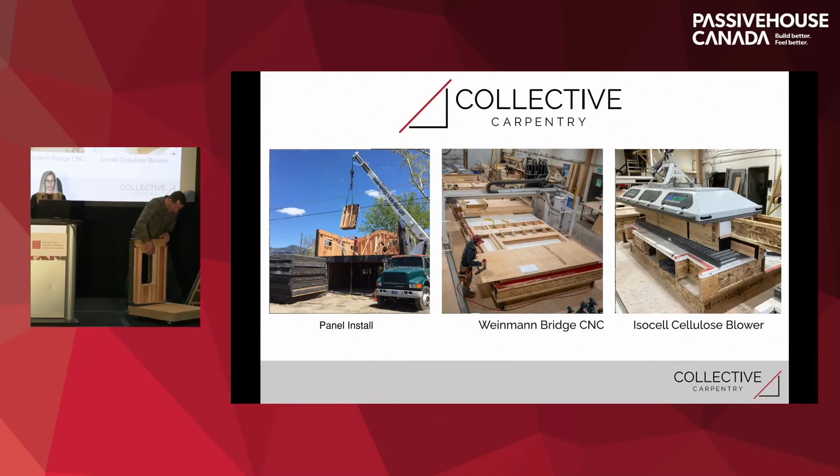Our scope of work includes the high-performance building envelope, structurally insulated and weather-tight and airtight as well with an integrated rain screen. We do the envelope of the building as well as any interior floors and structural load-bearing components.

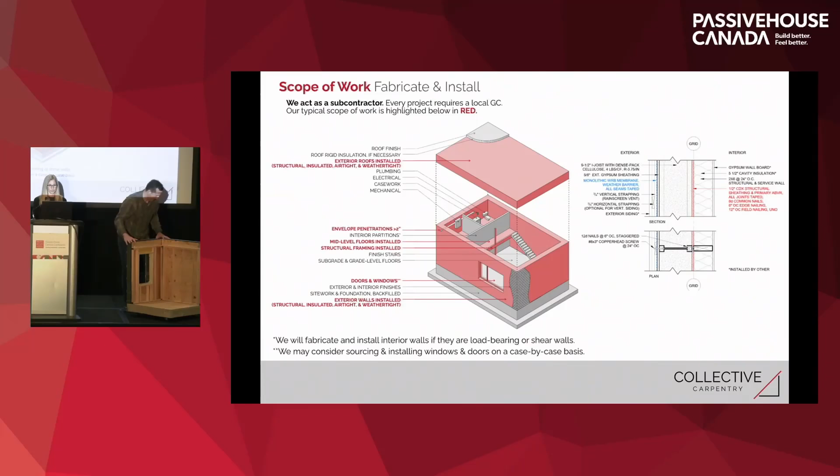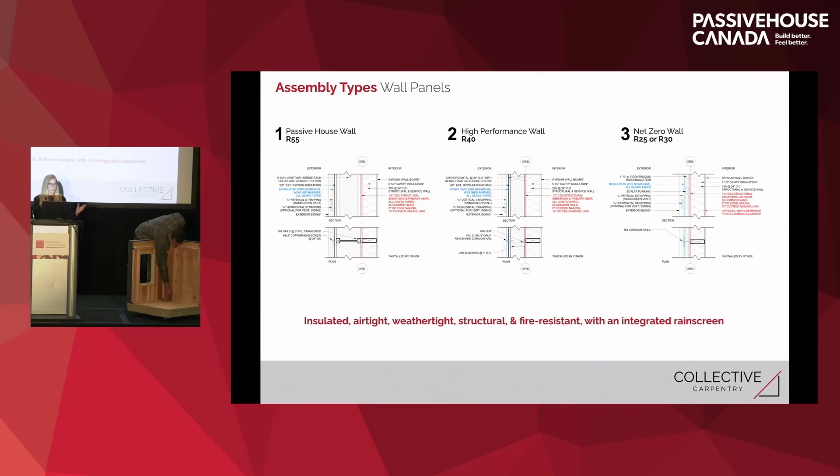We have 3 different wall types to accommodate different climate zones. Our bread and butter is the I-joist wall system, which is about R55, and that is what our model is showing here. It's composed of a 2x6 structural interior layer, and this is also our services layer, so it's installed open cavity. Beyond that, we have a 1/2-inch CDX air barrier.

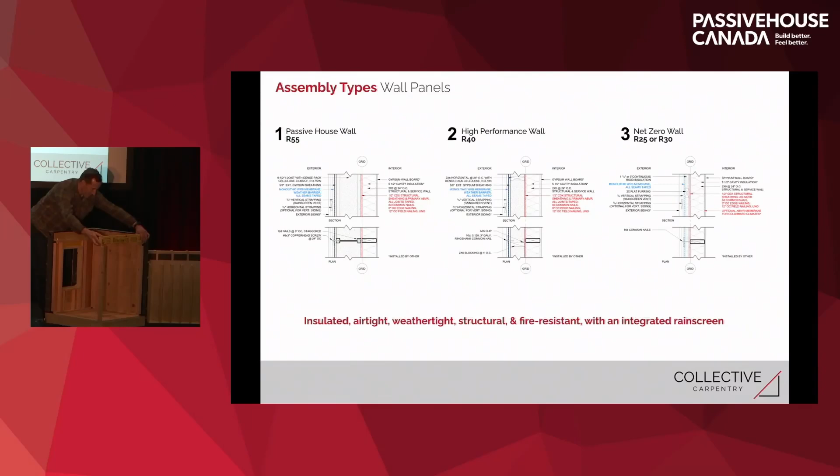The plywood is taped airtight, and beyond that is our continuous insulation layer made up in this wall type of a 9.5-inch I-joist, which is the cavity for our dense pack cellulose. We also have the WRB and, as I mentioned, an integrated rain screen.

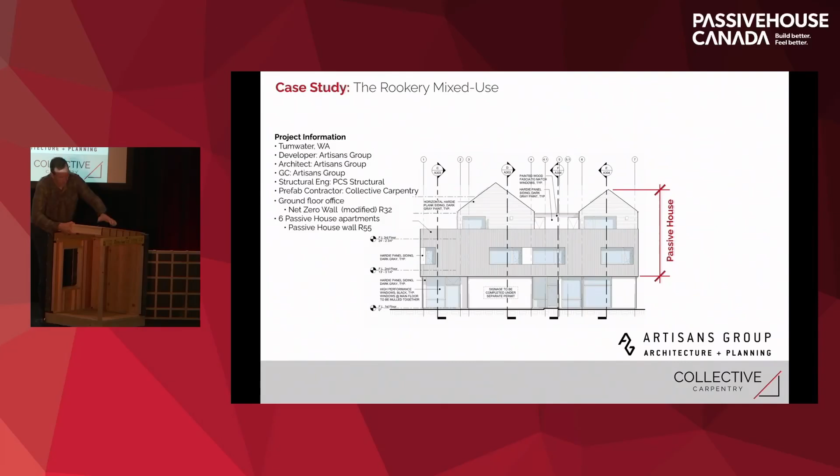We do some multifamily projects, and this is a project we completed last year in Washington State. This is a mixed-use building with ground floor offices, and the top floors are 6 passive house apartments. This is in Washington State, where the architect also served as the developer and the general contractor. And we prefabricated this. The walls are the R55 passive house wall.

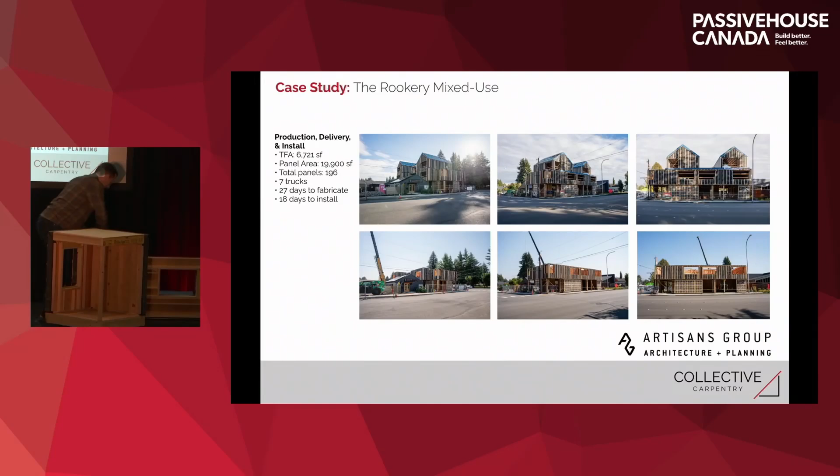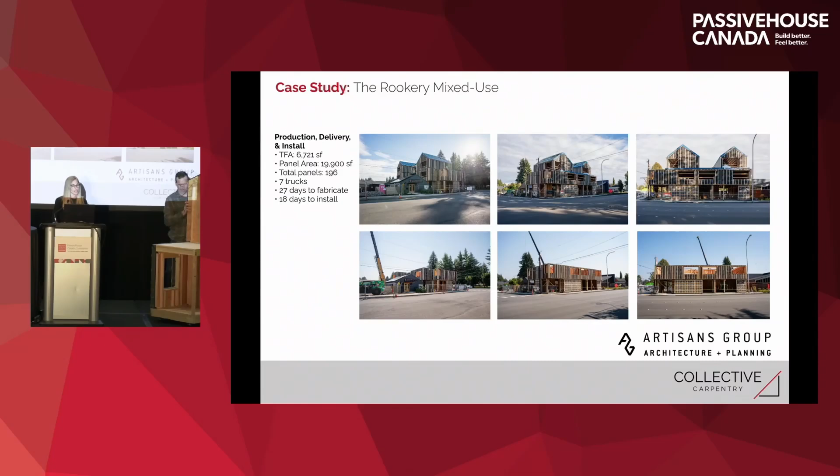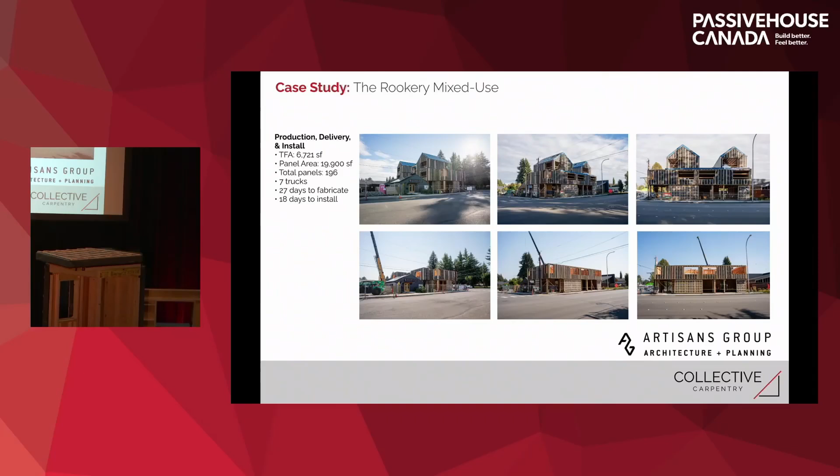The total TFA for this building was about 7,000 square feet, and the total panel area was just under 20,000 square feet. Altogether, we used about 200 panels on 7 trucks, and it took 27 days to fabricate. That's in our shop. So 7 trucks took this building to site, and it took 18 days to install. A little bit slower than the install that's happening here on stage.

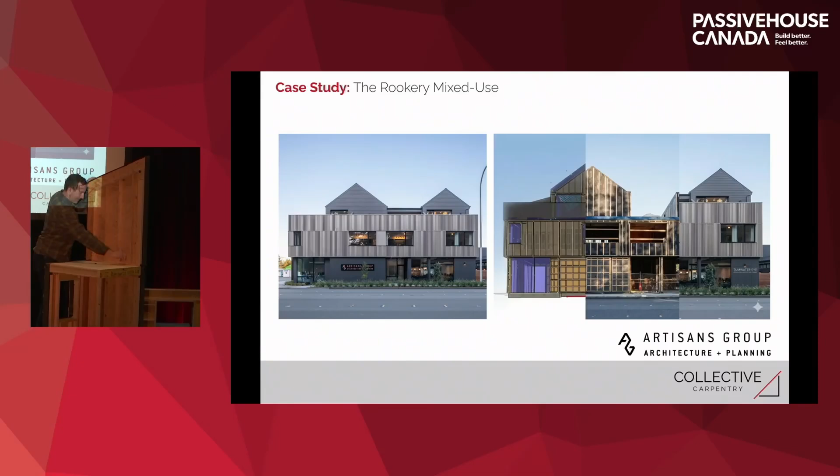So this project was completed last year, and it was done by our friends, the Artisans Group. So their office is on the ground floor, and the top floors have the passive house apartments.

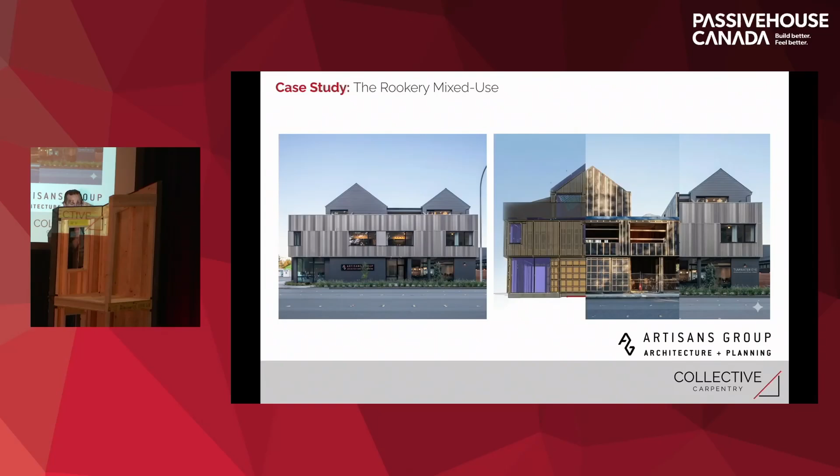And our insulated roof panel, we use the top-of-the-line membranes. Right now, Ryan is putting on the insulated roof panel, which has a self-adhering membrane. And on site, we're responsible for all weather taping and air taping.

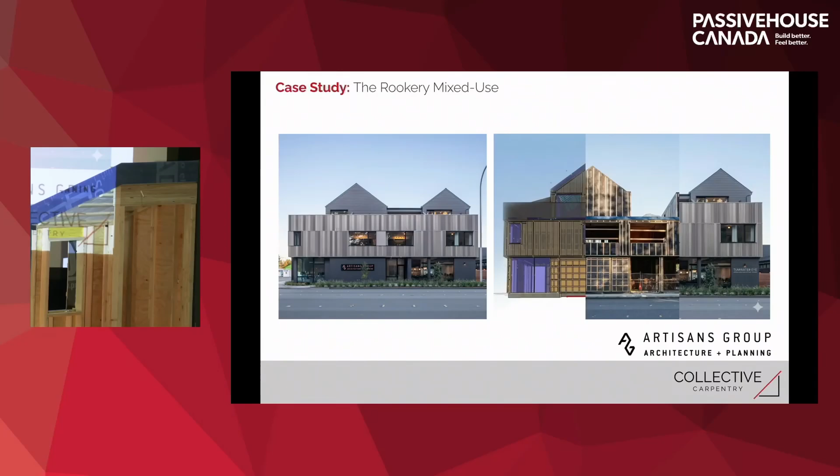So our system is most useful when high-performance builders are not available, mostly in rural areas. Prefab is also really advantageous for commercial projects, multifamily, where shortening your construction schedule is really helpful for making the numbers work out on some development projects, because we can reduce the schedule so significantly. And the last panel to go on is our overframe roof panel, which creates overhangs and venting.